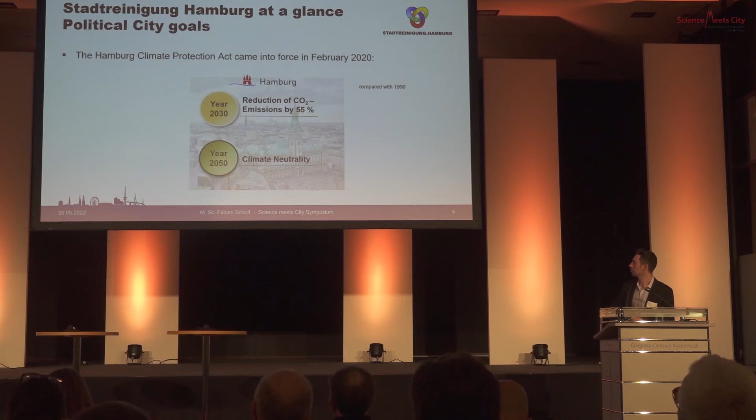So what about the politics? In 2019, the Hamburg Climate Protection Plan was renewed, and its aims are a reduction of CO2 emissions by 55% till 2030, and to become climate neutral till 2050. In the Hamburg Climate Protection Act, these goals were implemented into Hamburg law.

So it means we need an energy revolution to achieve this goal, of course the coal exit, and the government decided to change this this year. So it's not 2050 anymore. The public companies have to be climate neutral, according to a CO2 balance, till 2040.

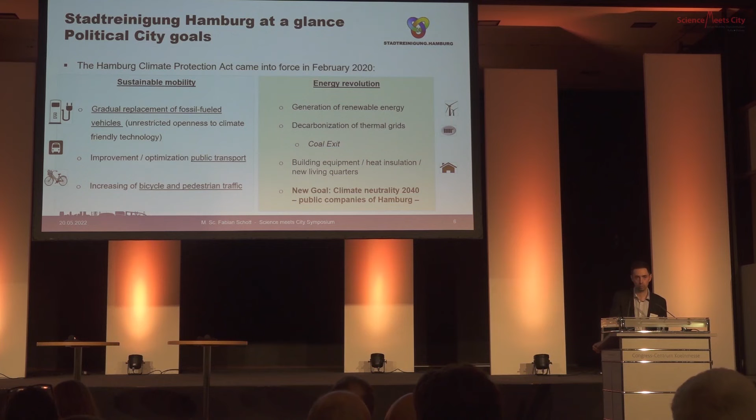So that means we need changes in mobility for us, for the Stadtreinigung Hamburg. The replacement of fossil fueled vehicles to electric drives is the most important factor.

But we don't look at the year 2040. We said at Stadtreinigung we want to be carbon neutral till 2035. This goal is based on these 5 solid pillars, which you can see in the picture here. So, of course, the best waste is the waste that doesn't exist.

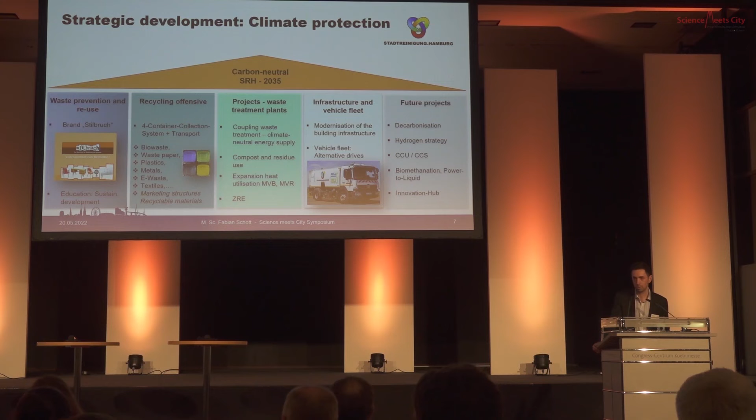Waste prevention and reuse is important. The most important CO2 emissions for us are the vehicle fleet and the thermal waste treatment. Today I will just focus on the vehicle fleet.

So here I give you a short overview. As I already said, we have around 1,100 vehicles. The challenge the city cleaning service has is that we have a different variety in function. So we have standard vehicles, working machines. We consider our vehicle fleet more as working machines than driving machines. We have light and heavy commercial vehicles and special vehicles like for bulky waste or for container treatment and so on. This is really a big challenge we have.

Here you can see a diagram of how the proportion is. Indeed, the most important numbers are the garbage collection trucks and street cleaning vehicles. They contribute the largest share, but we also have a lot of other machinery and equipment, and they contribute nearly a quarter of this. This is a great diversity in function.

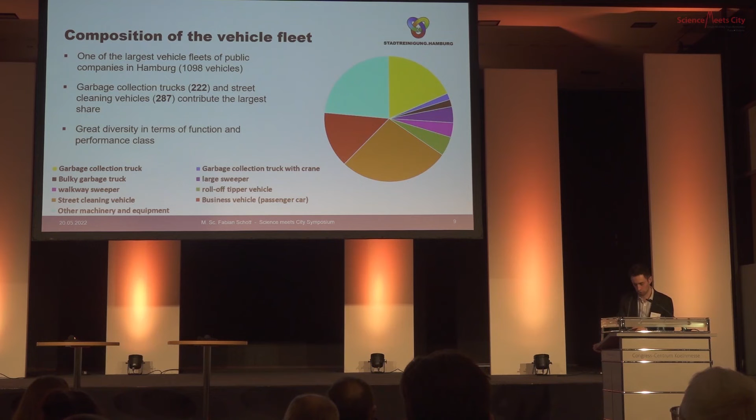What they all have in common is that we need electric drives which can operate for a minimum of 8 hours. They are big working machines, they need a lot of power, and that's the big challenge we have. So the cost is one factor, but at the end it has to work for a minimum of 8 hours. It's not like small passenger cars - we have to handle a big amount of waste mass and so on. That's a big challenge we have.

So indeed, we are trying to transform our vehicle fleet to a more electrified vehicle fleet. But at the moment, we also changed the older diesel trucks to more environmentally friendly diesel trucks with Euro 5 and 6 norms.

But indeed, you have to take into account that at the moment the prices for gasoline and diesel are increasing rapidly. Also, for the big trucks, we need AdBlue, and the prices for AdBlue are also rising rapidly. It's also possible that one day we have a lack of AdBlue and don't get it anymore, and then the newest trucks cannot drive without AdBlue, and then we cannot transport the waste in Hamburg. That would be a big problem. So that's also a big reason why we need a transformation to a more electrified vehicle fleet.

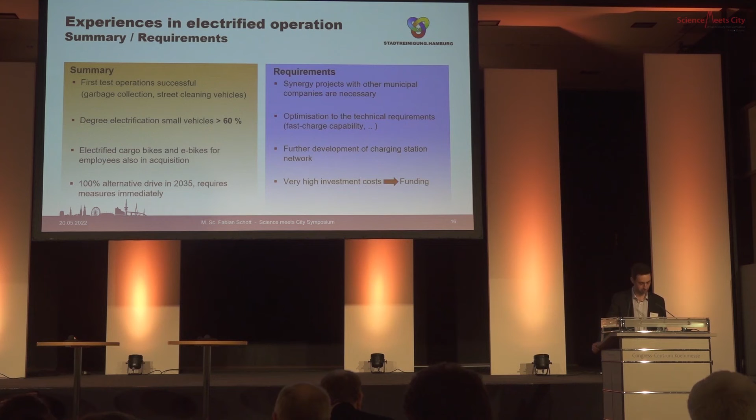We also want to replace the big diesel trucks with electric trucks, but this requires funding, because we are a public company financed by fees. I think a diesel truck costs around 250,000 euros - of course the number can change, but just to keep this in mind. A truck with hydrogen drive would be 4 times higher, and an electric truck would be 3 times higher in costs. Of course we cannot give this cost to the citizens of Hamburg, so some bit of funding is necessary for this transformation process.

And of course, we have to optimize also the technical requirements, so a fast charge capability for the electric sweepers and so on. Further development is necessary.

Okay, this is my last slide, I would end with this slide. Of course, we have also waste treatment plants, and waste to energy is also a big topic in my company. With the electricity from the waste incineration, with renewable energy, and we also have a biogas treatment plant, a bio-waste treatment plant, we can produce hydrogen out of this energy, which could then be used to load hydrogen drive vehicles, and this could also replace a lot of diesel fuel.

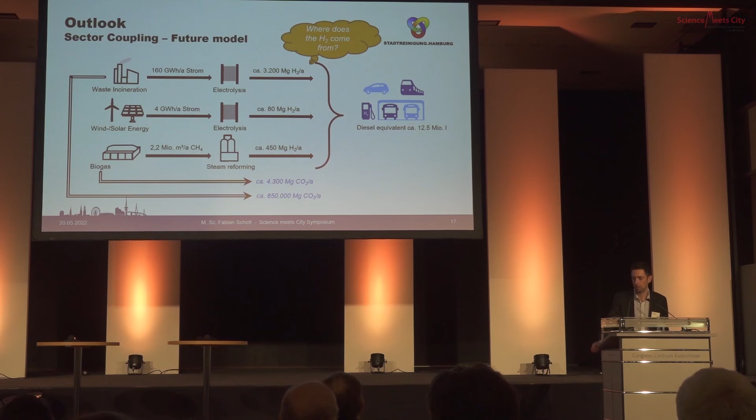Okay, I would end my speech. Thank you for listening.

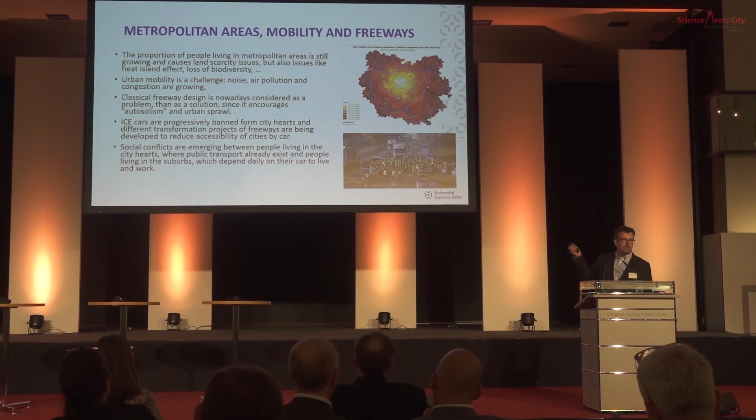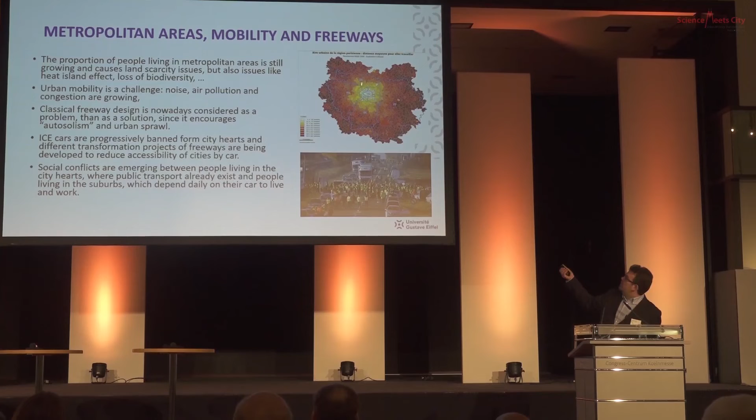So here you have a map of Paris area. The lighter the picture, the smallest distance people are traveling every day to go to work. So here is Paris, and here is the region of Paris. You can see that people here are depending on the car to go to Paris to work.

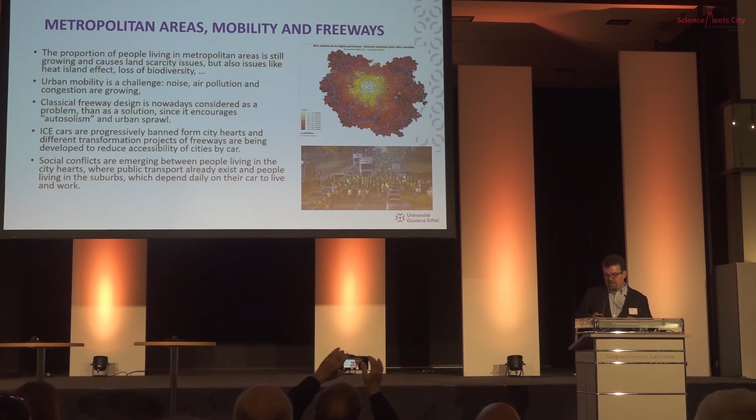And these people are not very happy when there is a traffic banning. So this was just for the introduction of the problem. If we try to present or to problematize the issue, is it possible to design a new generation of roads which are able to ease the development of livable smart cities while offering fair access to all citizens?

So this was the picture of roads of the old motorway, to increase the connectivity between the suburb and the city, and here is the political dream today. So we have a public heritage, which is a set of huge motorways built in the 70s. What do we do with this public common heritage? That's the issue.

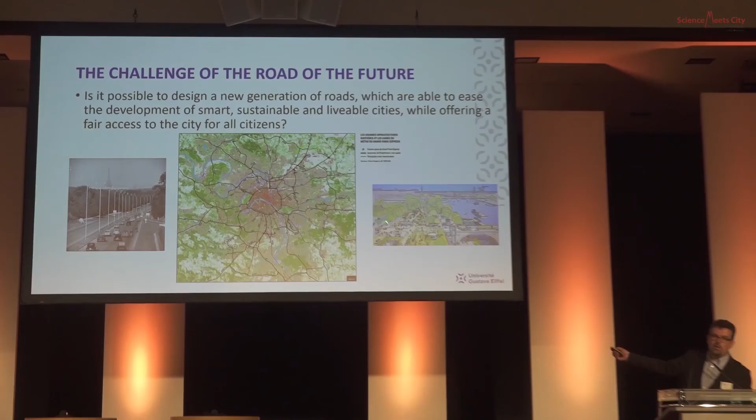At the same moment, societal issues are still growing. We have more and more issues. So here is a list, I won't read all the list, but urban air pollution, for example, is a great issue.

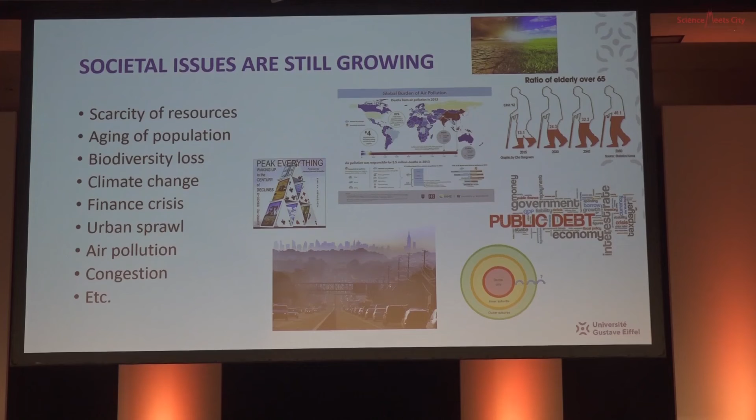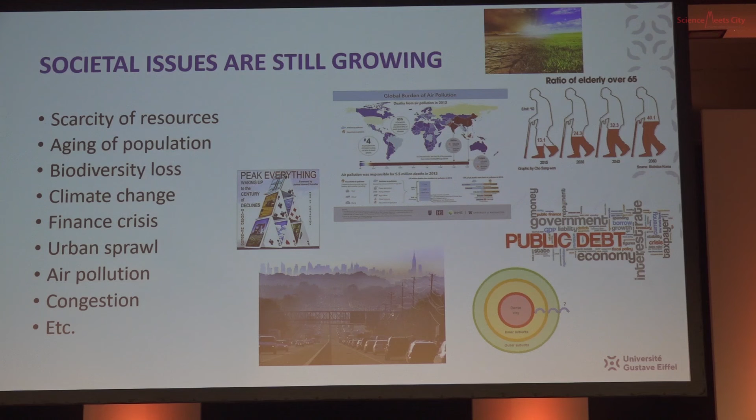So what is today the solution seen by, for example, the European Commission or public transportation agencies? The solution is that we have to travel differently. We could use connected and automated cars or mobility solutions like shuttles, electric cars, carpooling offers, shared mobility fleets, or we could combine all the solutions and install multimodal solutions like mobility as a service into the cities so as to still keep the accessibility of cities. But the question is, all these solutions need dedicated infrastructure.

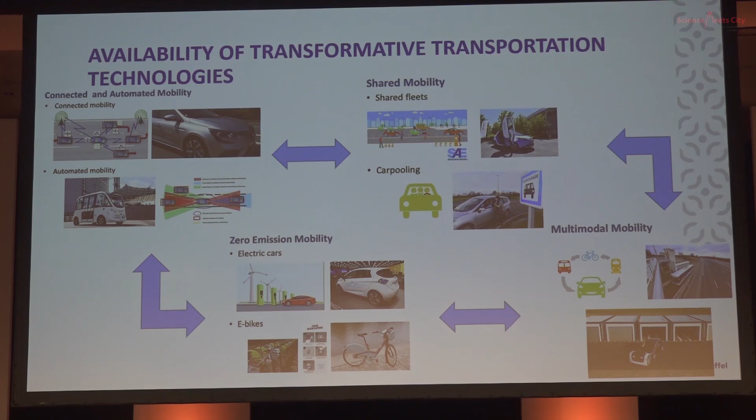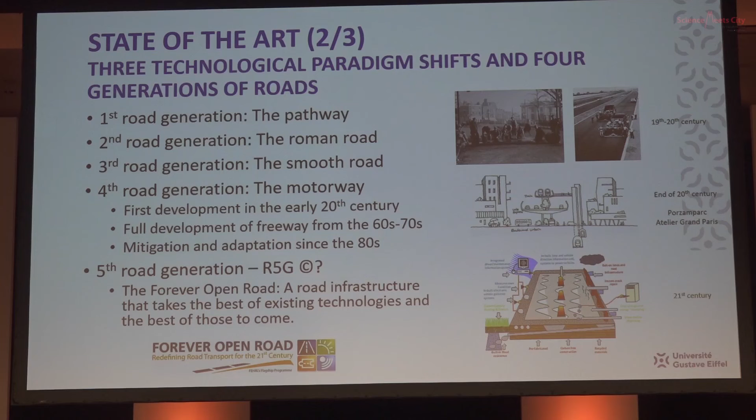So this is our current program, developing the 5th generation road, a road infrastructure that takes the best of existing technology and the best of those to come, so as to have a lean process of innovation in infrastructure.

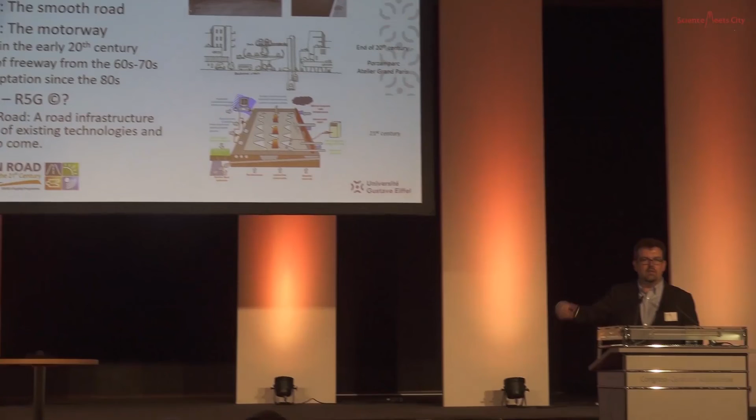Why? Because if you tell me how you travel tomorrow, I will be able to design the infrastructure that you need tomorrow. If we look at the past, just taking the 20th century, we built the motorway to allow motor vehicles to travel. So if we travel differently, we don't need motorway, but what do we need?

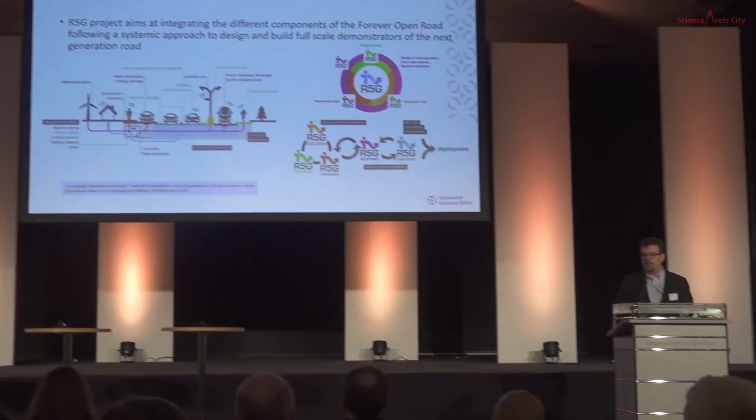That's our program that we developed over 10 years in line with a European project named Forever Open Road, which is also carried out here in Cologne with our colleague from BAST in Bergisch Gladbach. So our program tries to integrate the different components of solutions from the Forever Open Road program, following a systemic approach to design and build a full-scale demonstrator of the next generation of roads.

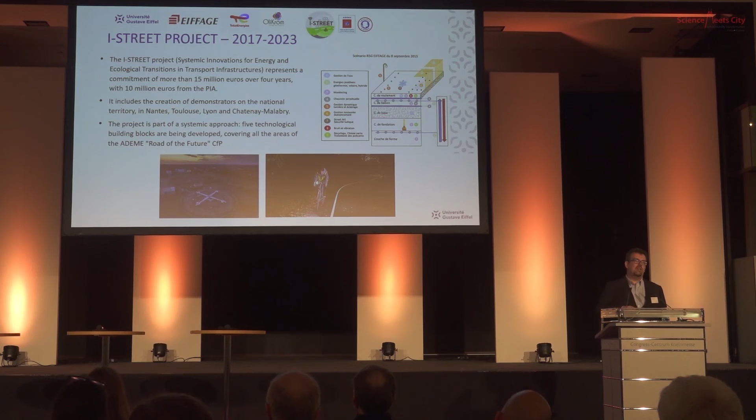Some key results: we have convinced civil engineering companies, major companies like Total or Eiffage, to develop more systemic development like the I-STREET project.

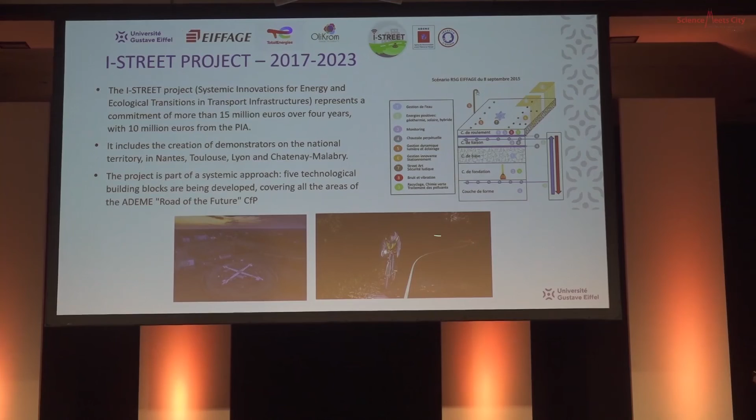For example, to encourage bicycling, we developed photoluminescent painting to light public bicycle lanes and increase the development of bicycle use. Second, a roadmap to align the development of infrastructure readiness level towards the automation of vehicles.

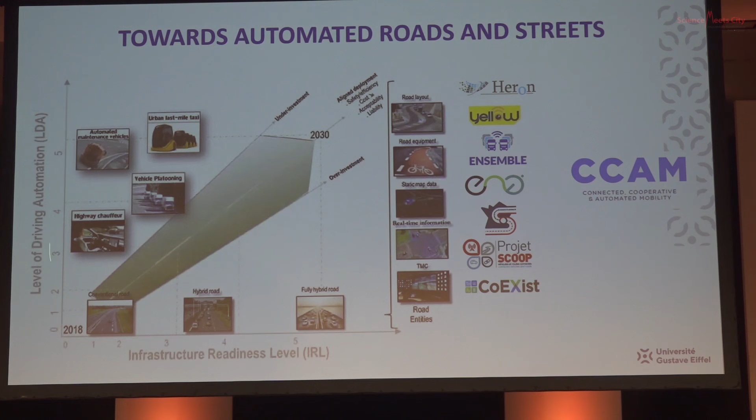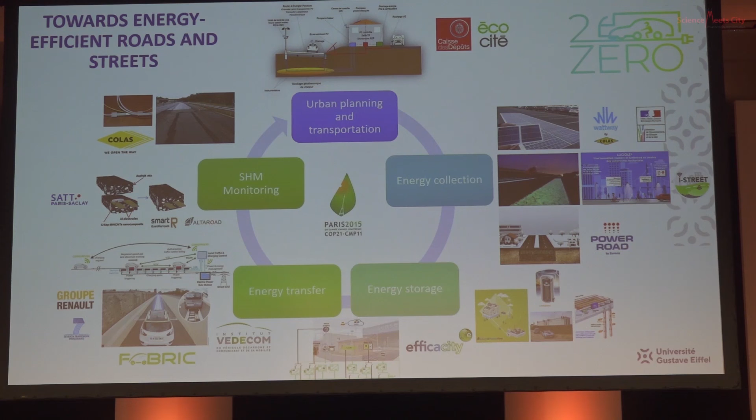In terms of energy, we try to build energy efficient roads and streets. What it means is that roads are able to harvest, use, store, or deliver energy to buildings or users of streets, like a car.

We try to move away from the classical design of freeways. In French, the VIC model is an interaction between vehicle, driver, and environment, which explains why you have this big motorway design: because you consider an old car with slick tires, with a blind driver on the motorway, and you have to show that the design of your motorway is able to stop the car safely. So you take big measures.

But if you have ubiquitous information, if you have clean energy at your disposal, it allows you to design roads differently. That's the concept.

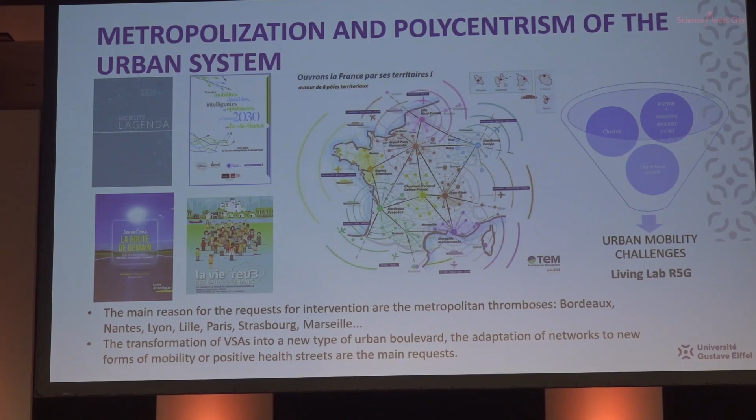And then we deploy this model in the cities, and I will try to explain - how many minutes do I have? Three minutes? Two minutes? Okay, I will try to explain.

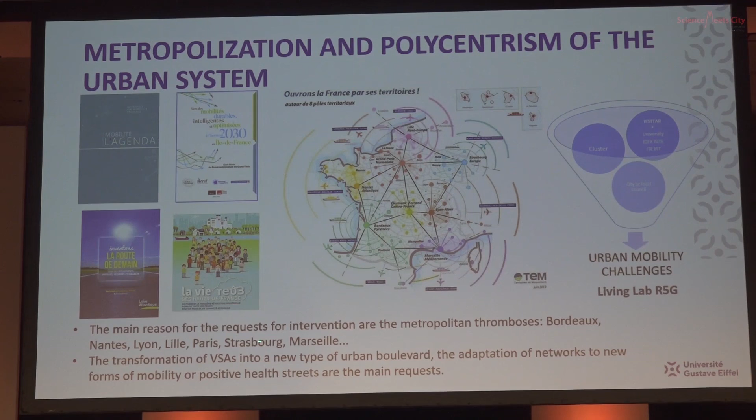At the moment it was just a concept, and we have the demand of different metropolises - requests for intervention on congestion or urban boulevards to develop new mobility solutions, or what we call positive health streets. We have just presented you 4 business models or business cases for the next generation of roads.

We have urban networks that can be transformed, like thanks to the changing of public lighting. This is a clear business model to change the design of the streets.

We have the peri-urban networks, big motorways, city motorways, where we can transform additional lanes to welcome public coaches, and next public shuttles, so as to increase capacity. And we have the public money to do that, because the companies are paying for it.

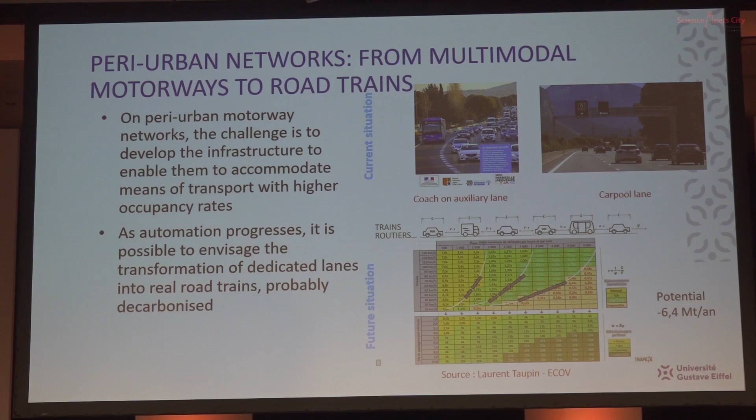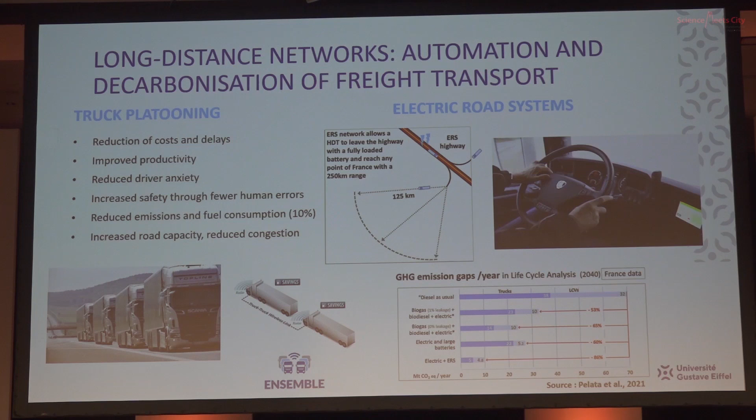Of course, if we live more in cities, we have to eat, so we have to be delivered with goods. We also have to improve the long-distance networks, and we are working on truck platooning, for example, or electrification of trucks on motorways.

And for peri-urban networks, we are working on autonomous shuttles. I don't know if it works.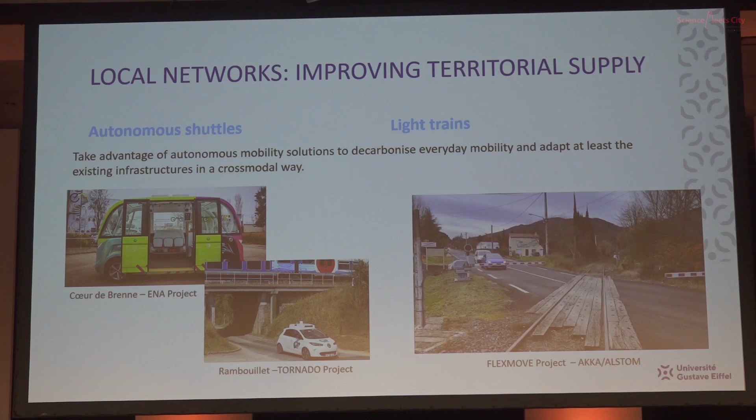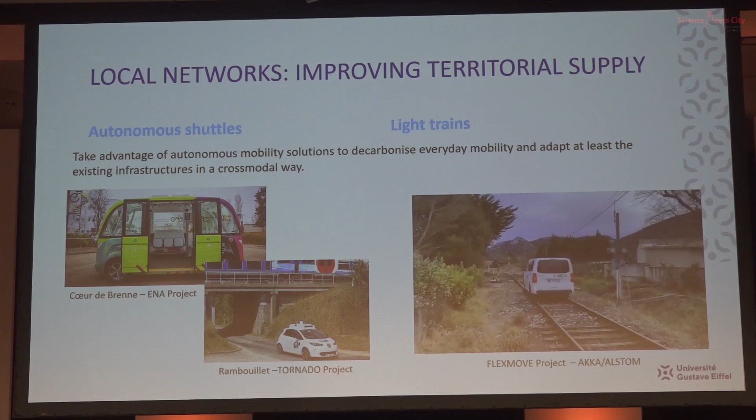Just 50 seconds - you see what we do, for example, in the Pyrenees or in the Alps, in abandoned railway infrastructure. We are working to install autonomous vehicles, so road vehicles can be put on this abandoned railway, so as to develop new mobility services.

So I will try to conclude rapidly. Roads and mobility are at the heart of our society. We have the issue of solving urban mobility at the metropolitan scale, and it requires a transformation of road infrastructure. This new generation of roads has to be adaptable, automated, and resilient. Our project aims at developing and demonstrating solutions, and different territories in France are working along these directions.

I would like to stress that in the interurban environment, the next challenge now is to rethink the relationship between motorways and territories, and to propose a closer approach between town and country, allowing the achievement of the Sustainable Development Goals. Thank you for your attention.

Merci beaucoup, Monsieur Hautière. What is next after R5G?

It would be, in fact, related to my last sentence: it would be the road of the Anthropocene era. A road that is able to store CO2, a road that is able to monitor and increase and protect biodiversity, and so on.